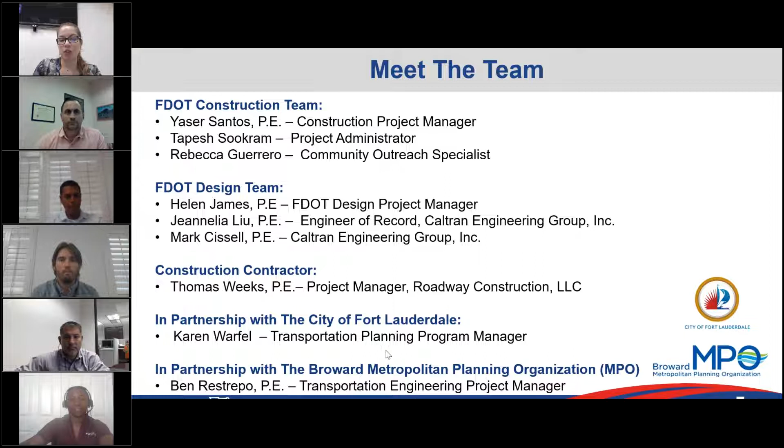In partnership with the City of Fort Lauderdale, we do have on the line Karen Warfel. She is the Transportation Planning Program Manager. Lastly, in partnership with the Broward Metropolitan Planning Organization, the Broward MPO, we have Ben Restrepo, which is the Transportation Engineering Project Manager.

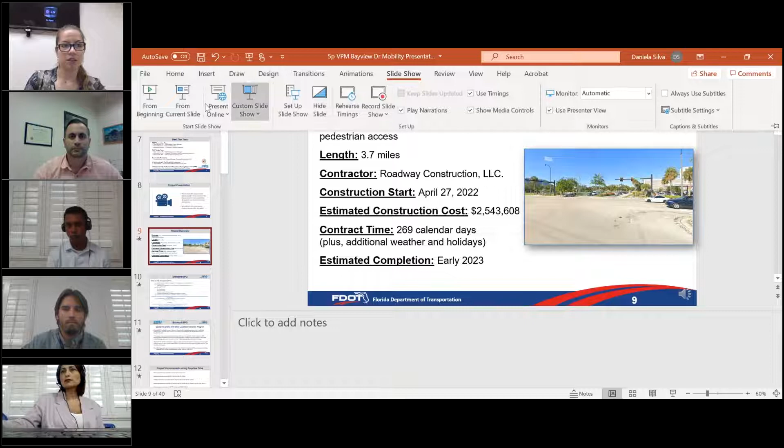As mentioned, the calendar days do not include weather or holidays. The estimated completion for the project is in early 2023.

Slide 10, Broward MPO. The Broward MPO is a federally chartered entity responsible for transportation decision-making in the Broward region, influencing and overseeing expenditure of federal and state transportation funds at the regional level. The Broward MPO consists of 31 municipalities, including the Broward County School Board and the South Florida Regional Transportation Authority, which also develop plans, conduct studies, and establish initiatives and programs. Their mission is to collaboratively plan, prioritize, and fund the delivery of diverse transportation options.

Slide 11. The Broward MPO Competitive Grant Program provides funding opportunities for small local transportation projects which improve safety and mobility for all transportation users in Broward County. The program also funds projects such as complete streets projects, traffic calming and intersection improvements, ADA upgrades, mobility hubs, bus shelters, bike racks, and technology advancements such as transit signal priority and traffic control devices. Applicants are required to submit program-ready projects with proof of roadway ownership, a well-defined scope of work, partner collaboration, cost estimate, documentation of public outreach, and resolution support.

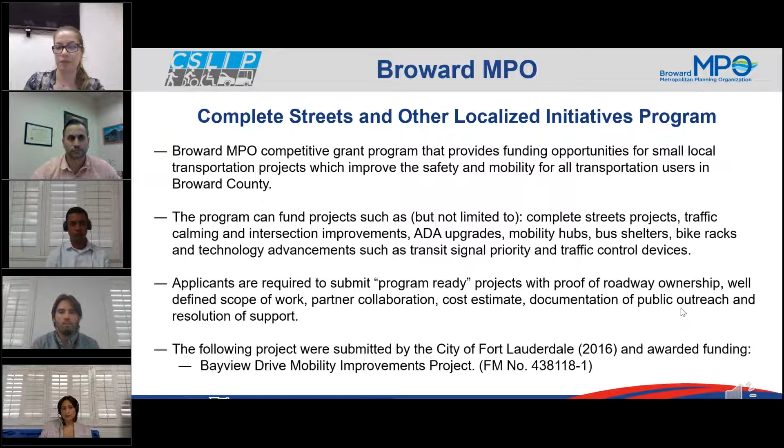As part of this project, improvements along Bayview Drive include providing continuous sidewalks on both sides of the road, adding bicycle lanes from Northeast 26th Street to Northeast 25th Place, installing mid-block crossings between Northeast 11th Street and Northeast 45th Street, raising the intersections at Northeast 14th Street, Northeast 18th Street, Northeast 27th Street, and Northeast 40th Street, and constructing roundabouts at Northeast 37th Drive and Northeast 47th Street. This project will also include widening the roadway from Northeast 23rd Street to east of Northeast 24th Court.

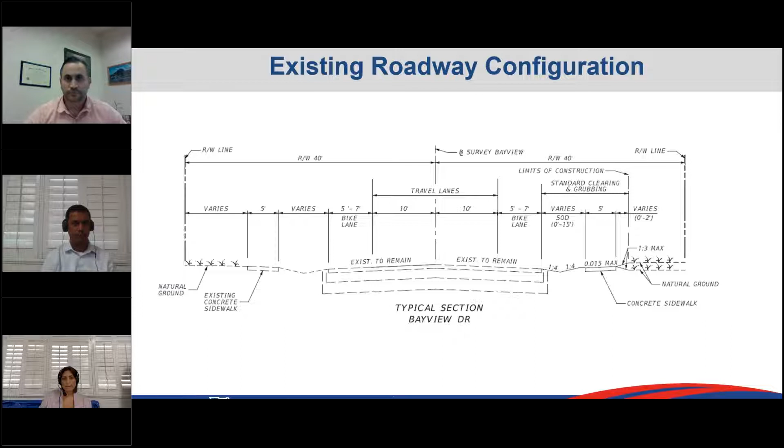So we are currently on slide 14, showing the typical section for Bayview Drive and Northeast 13th Court, with 10-foot travel lanes eastbound, northbound, and southbound, 5 to 7-foot bike lanes, and swale areas with sod that vary from 0 to 12 on the southbound area, and from 5 to 6 on the northbound area. The bike lanes are 5 to 7, and then the sod or swale areas are 5 to 6 on the northbound, and 0 to 12 on the southbound, including also the sidewalk, a 5-foot sidewalk in each direction. Next slide, please.

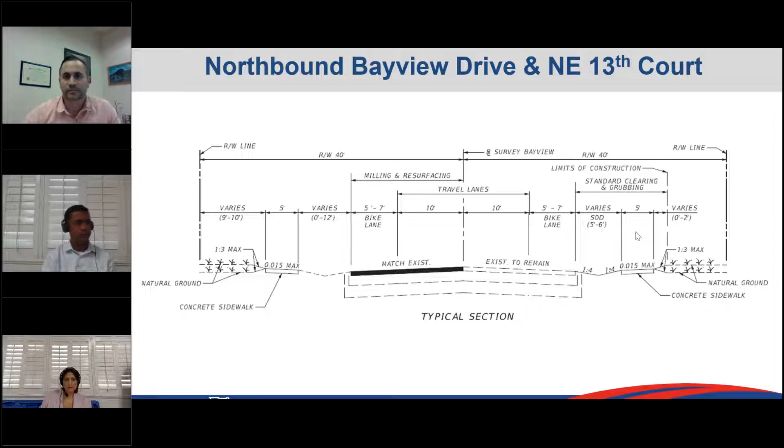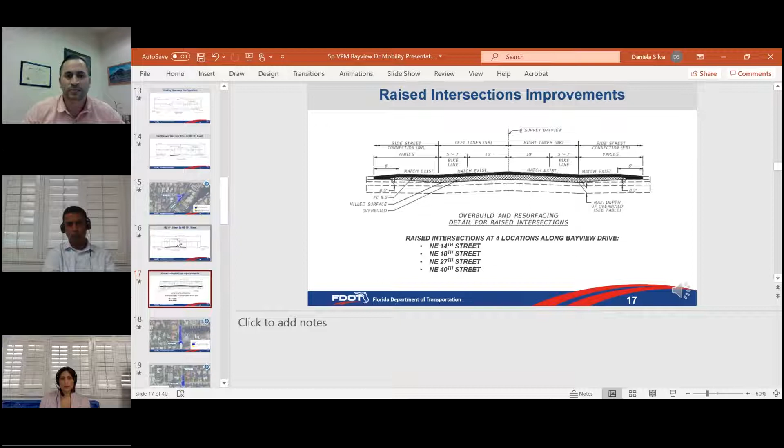Daniela, please go back to the previous one. Thank you. Sorry, bear with us for a second. All right, so that will be slide 15. I think it's the previous one. There you go.

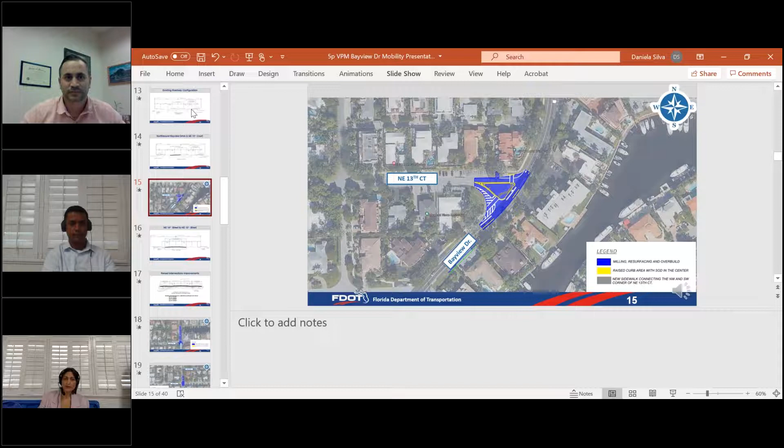Thank you, Daniela. All right, so in the area, as I mentioned, we are using the yellow lines to denote the raised curb area with sod in the center. The gray highlighted portion shows the sidewalk connection in the middle of the island, and then the white lines are showing white striping. Next slide, please.

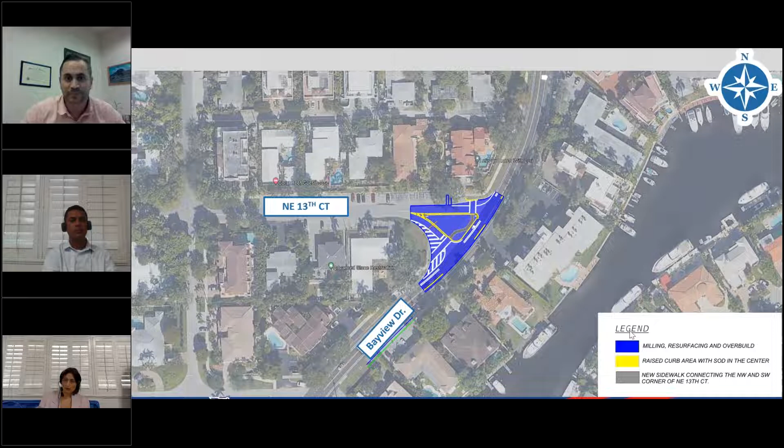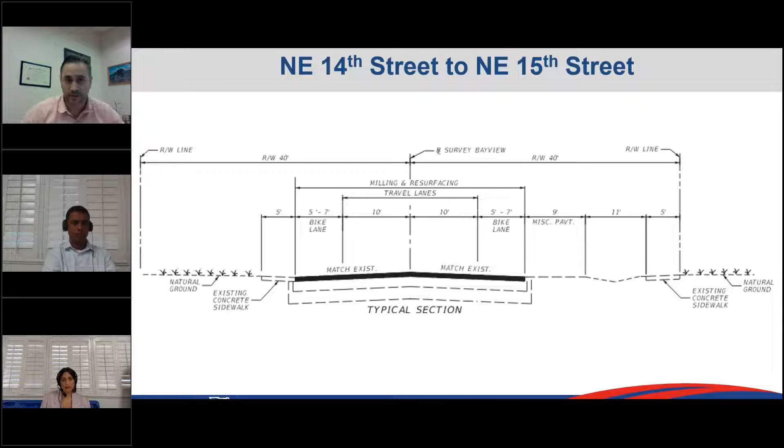This slide shows the area where we are working on the intersection. These are the intersection improvements happening at Bayview Drive and Northeast 14th Street, Northeast 18th Street, Northeast 27th Street, and Northeast 40th Street. We're going to be milling, resurfacing, and repaving, keeping 10-foot travel lanes in each direction, 5 to 7-foot bike lanes, and matching the side streets.

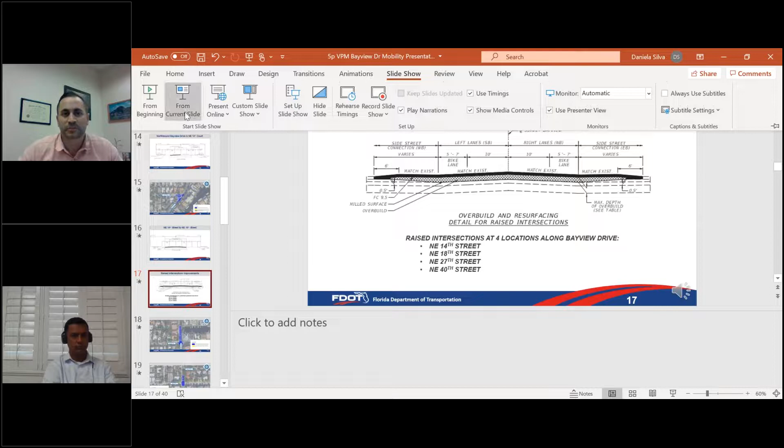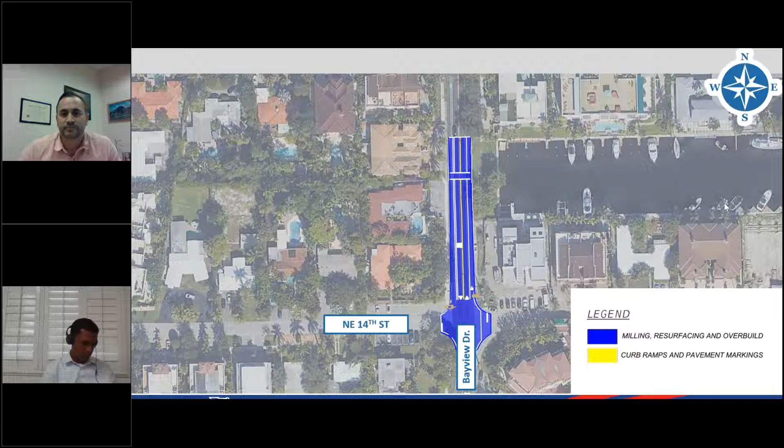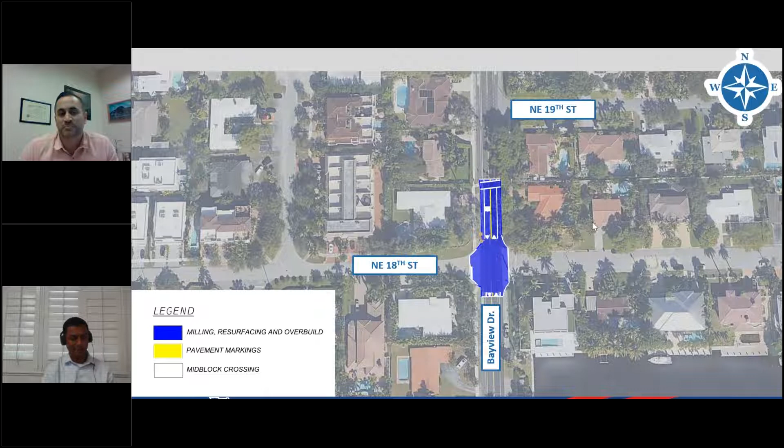The other intersection where we're raising the pavement is at Northeast 18th Street and Bayview Drive, where we're highlighting in blue the area to be repaved. Again, white lines show striping and a mid-block crossing just north of Northeast 18th Street, and yellow shows pavement markings as well.

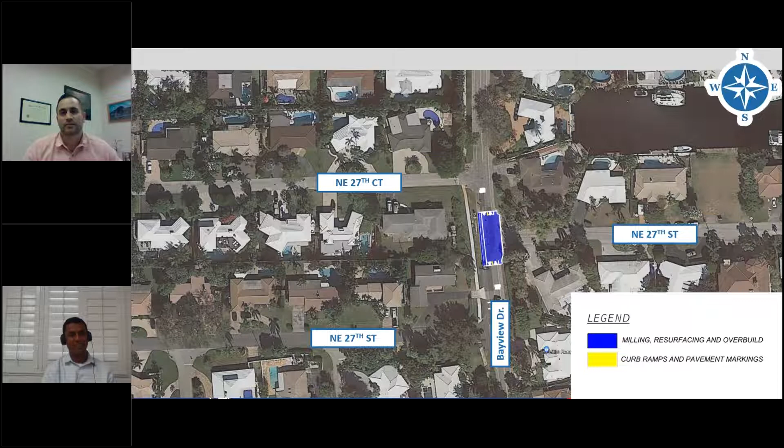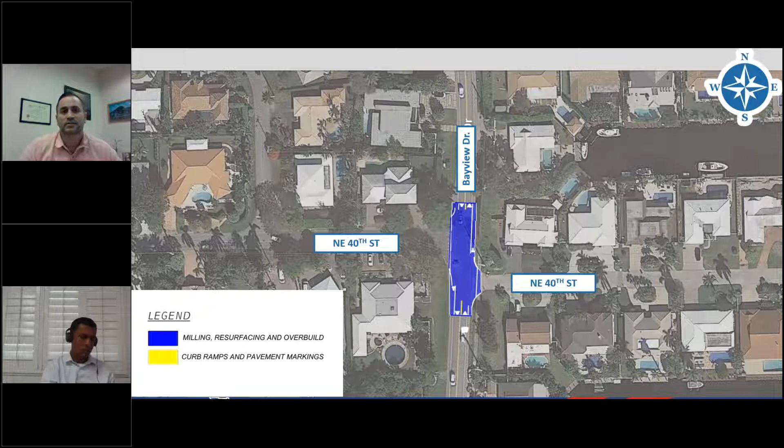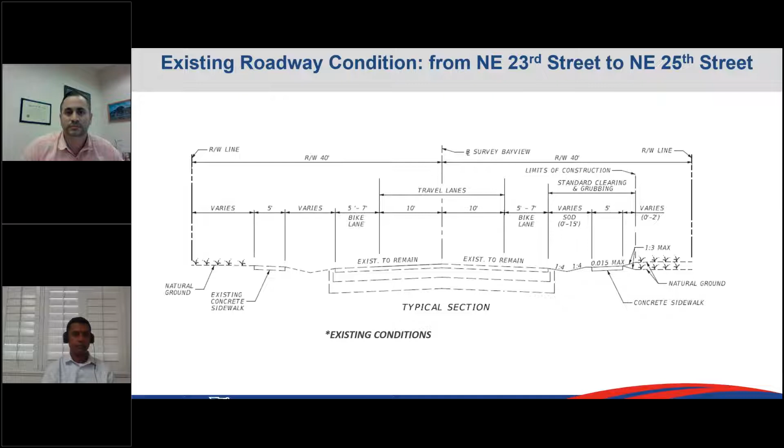In this area, we are showing the location from Northeast 23rd Street to Northeast 25th Street, but emphasizing where we are going to be widening and addressing two intersections. We'll provide 10-foot travel lanes in each direction and 5-foot bike lanes, matching existing grade. Also, a median varying from 0 to 9 feet will be implemented.

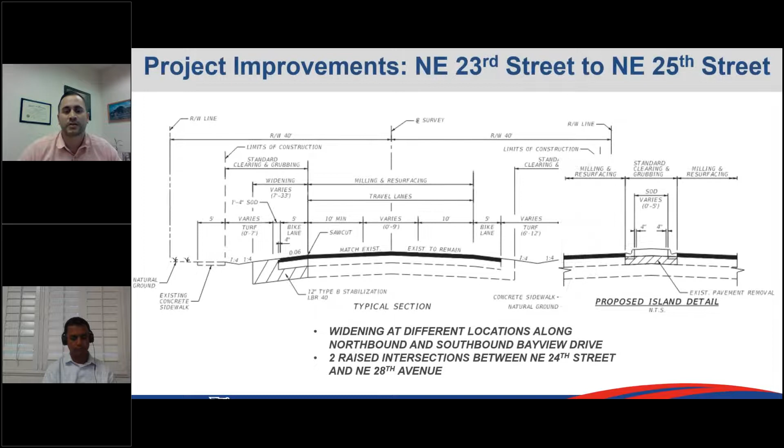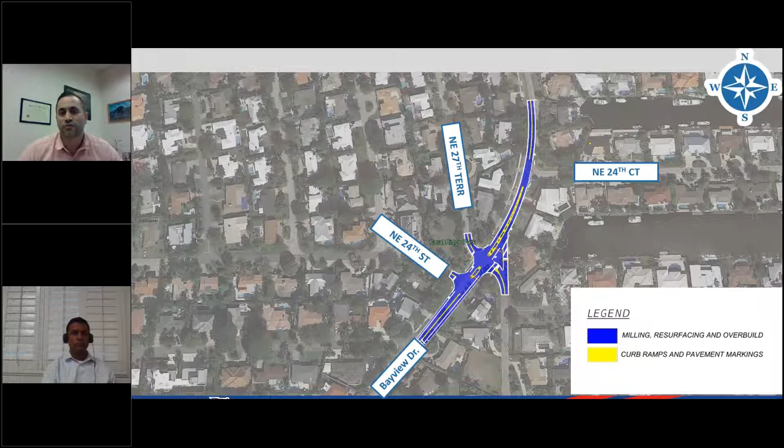At this point, I'm going to pass it over to Mr. Tapesh Subram, the project administrator, who will be taking the lead on this project. I'll be highly involved with him to achieve a successful project, so thank you for your attention. Tapesh, you can take over. Thank you, Yasser. As Yasser mentioned, my name is Tapesh Subram.

I'll be the project administrator for this project, and I'll be providing narrative for slides 25 to 33. Slide 25 shows the milling limits along Bayview Drive southbound beyond 26th Street. This area will be widened, milled, and then repaved.

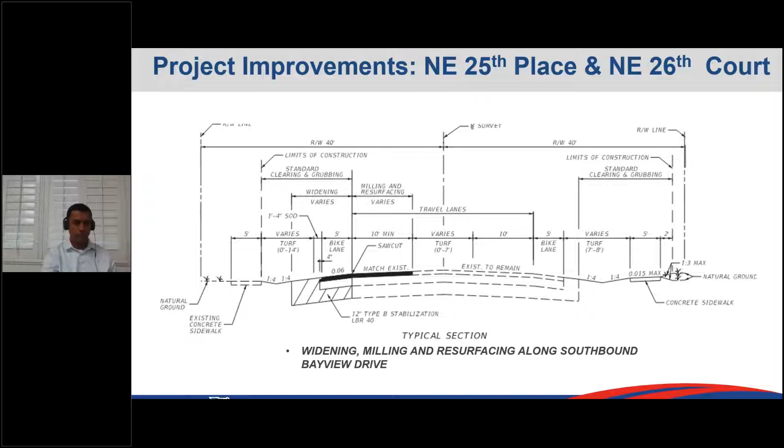Slide 26 shows the proposed improvements at the intersection of Bayview Drive and Northeast 26th Street. The intersection will be widened, milled, and repaved. No changes will be made to the existing lane widths.

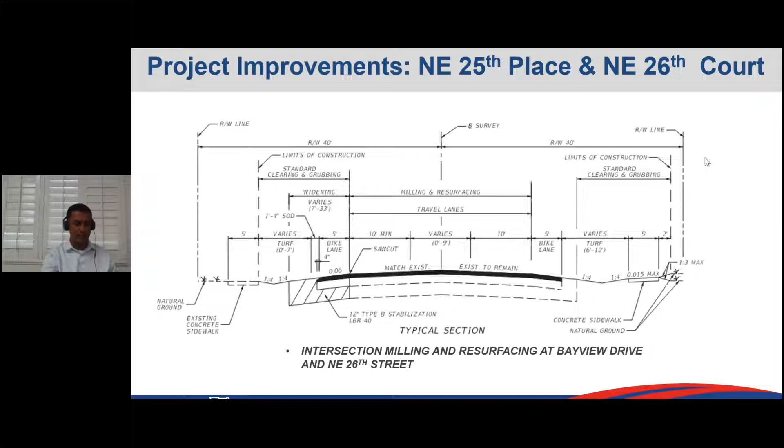Slide 27 shows the limits of the proposed improvements between Northeast 25th Place and Northeast 26th Street. The image on screen shows the final configuration of the limits at this location.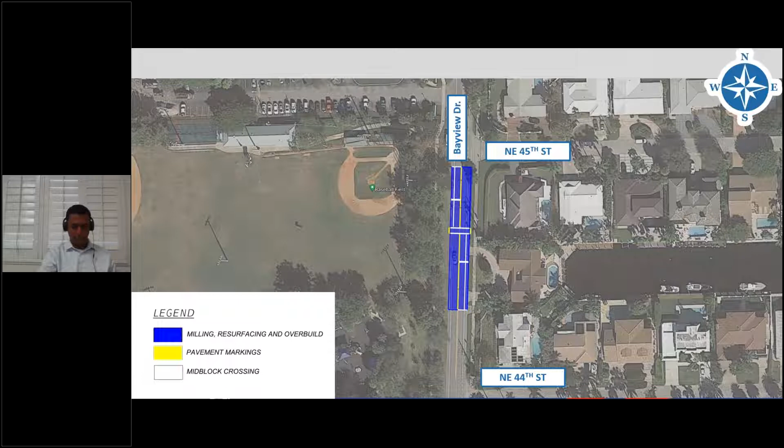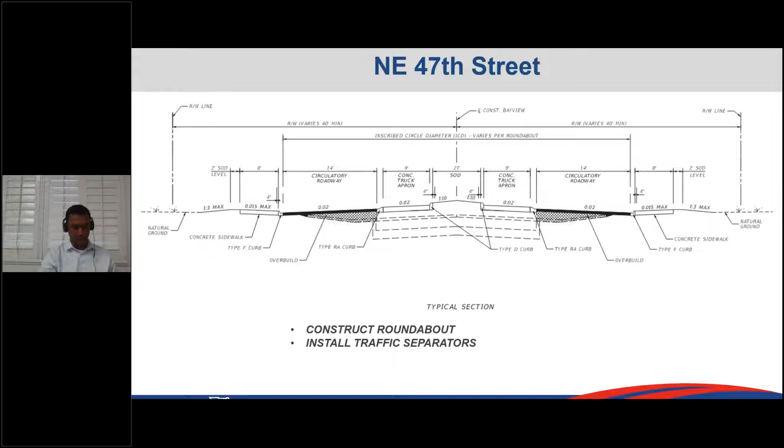Okay, so this is the second roundabout proposed for this project. Slide number 32 shows the cross sections of the proposed roundabout at Northeast 47th Street and Bayview Drive. At this roundabout also, the improvements include 8-foot sidewalks, new curb and gutter, and also a 14-foot circulatory roadway. Next slide.

Slide 33 shows the final configuration of Northeast 47th Street and Bayview Drive. The area shown in blue shows the areas to be milled and resurfaced. The areas shown in yellow are the raised curbs and new traffic striping, and the areas in green show the new proposed sidewalk along Bayview and how it connects to the existing sidewalk. Next slide.

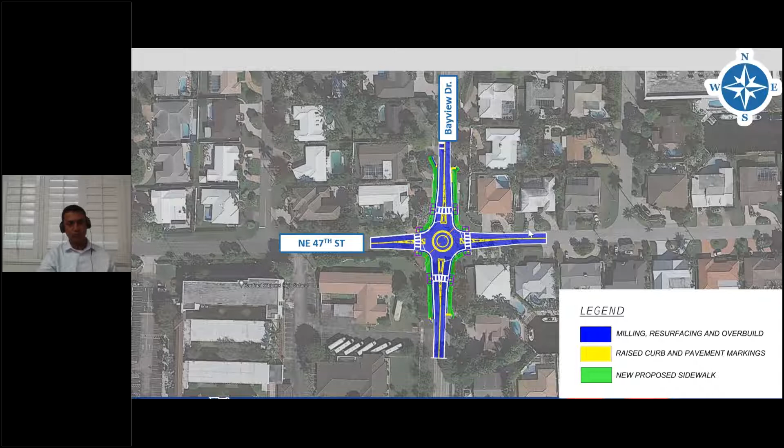Thank you to Pesh and Yasser. We're currently on slide 34, maintenance of traffic. Public safety is FDOT's top priority, so work zone signage will be placed along the corridor, consisting of advanced warning and project signage and lighted messaging boards. Ongoing coordination with local agencies and businesses will be conducted to ensure bus route accessibility and access at all times. Currently, the team is coordinating with Broward County Traffic Engineering Division, Broward County Transit, City of Fort Lauderdale, local first responders, and Broward County Schools.

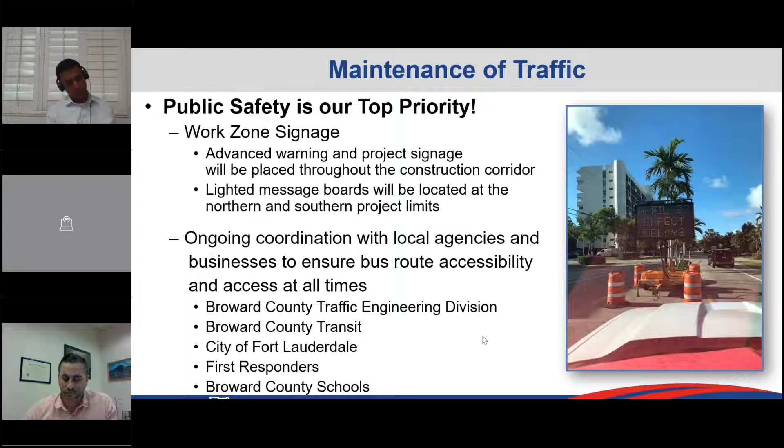Slide 37, we will now go ahead and open up the floor to any questions or comments. We do have some comments already in the queue, so I will begin reading them out for the team to address. The first question, from Catherine Taylor, asks if we will be sending out the PowerPoint presentation. This presentation will actually be placed directly onto the project webpage.

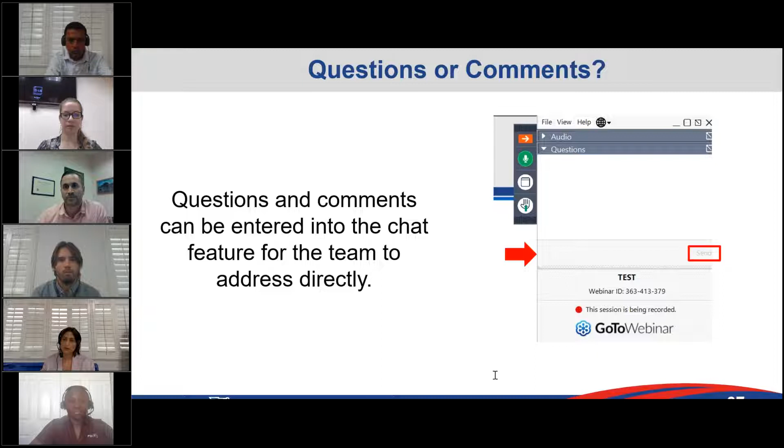Sure. Daniela, at this point, I would like for the designing team to turn on their cameras as well. Going back to, and thank you for your question — while responding to that, this project was part of a study performed by FDOT on behalf of City of Fort Lauderdale. The scope of work determined that those intersections were the main ones, but I would like to pass it over to the designing team. In this case, we have Janelia, and we have Mark. We also have Helen. Perhaps they would like to expand on that. Thank you.

So Daniela, perhaps we should repeat the question. The question was, how do we get an additional raised intersection at 25th Street and Bayview? Perhaps some kind of speed bump is necessary between 26th Street and 24th Court.

I'll recommend they reach out to the city, because the city prepared the intersections that were scoped for the project to be raised. They did explore putting speed bumps along the corridor. However, speed bumps do hinder emergency vehicles, so I don't think they'll like to install one in this location. But for another raised intersection, yes, we can bring that up to the city.

The next question we have: how high will you be raising the intersection at 40th Street? I can answer that, and then perhaps Janelia wants to jump in. The maximum overbuild we're implementing in the area is going to be 3 inches. Janelia, would you like to expand on that, or Mark?

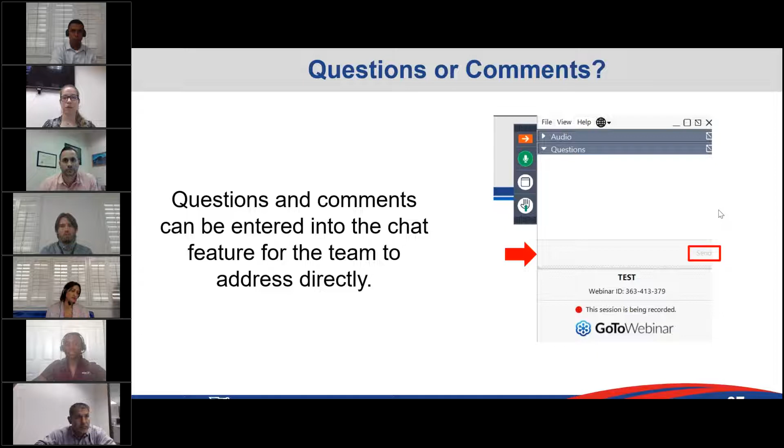A follow-up question from Kimberly Ruggiero: we were told a roundabout is being put in at 26th Street and Bayview. Is that being done by the city, or will that be implemented as part of this project?

I can take that question, Daniela. That will not be part of this project. I would defer to someone from the city to comment on whether it's part of the scope of their upcoming projects. It will most likely be considered for a future project.

We have an additional comment: we were told this project would not begin until school concluded. However, there is a new sign on Bayview Drive that says construction begins May 7th. Can you please clarify?

Yes, I can take over. Tabesh, basically the project is on track to start this week, as we are showing in our flyer and communication. However, the area by the school, which is the roundabout by 47th Street, is limited to happen once school is out during summertime. That's the only time frame we have to build that. As soon as we reach August, when school comes back, we need to be out of the area. That's a strict requirement we have in the plans.

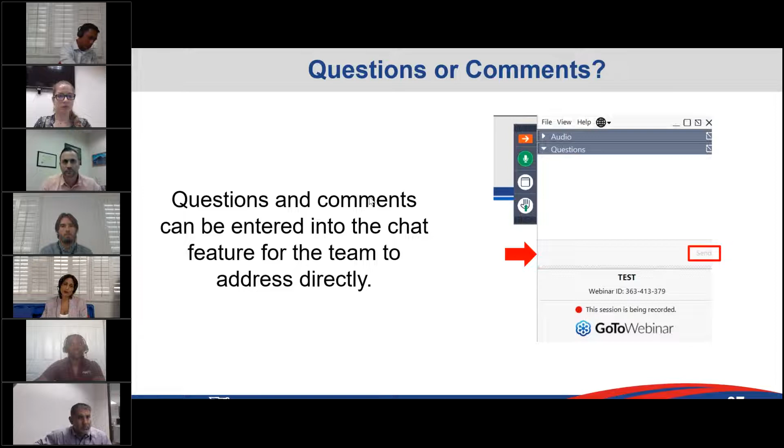Thanks so much. I was wondering, can you go back to one of the very beginning slides, the project improvements? Which one, specific intersection?

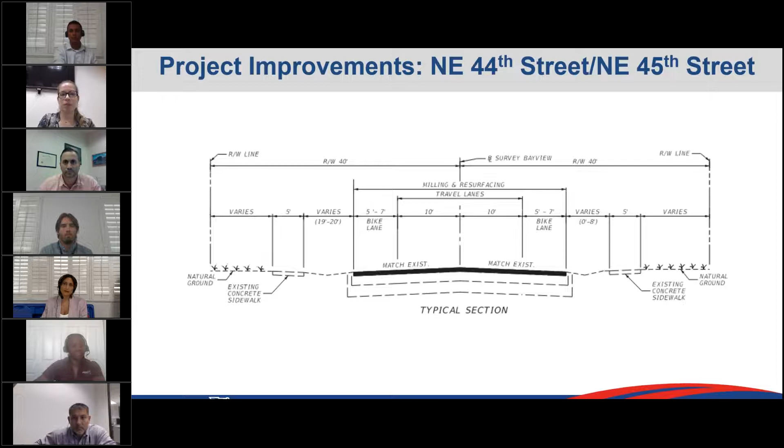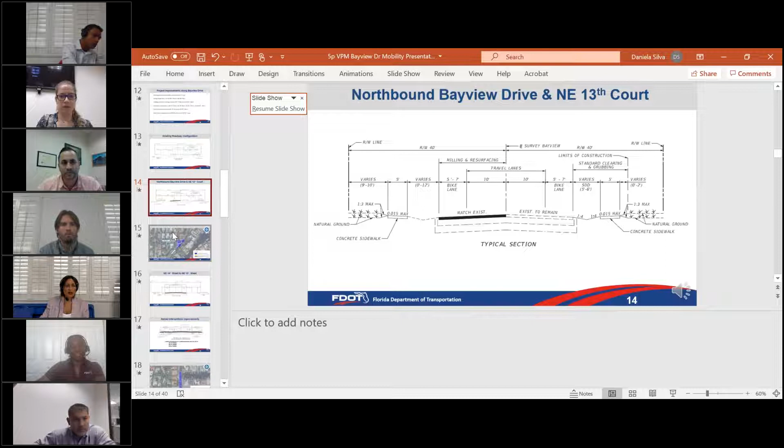It started with providing continuous sidewalks, it was one of the very first ones. It gave an overview, I think it's the general slide where we show this. That one, I think you passed it. It was that one, the one right on top, slide 12. Yeah, should I be... I think it's 12, yes, it's 12. Should be 12, Daniela. Perfect, yeah.

This is slide 12. I still can't, the slide up right now is still project improvements Northeast 44th Street. The slide I'm looking for says project improvements and begins with providing continuous sidewalks, and below that is a bullet that says adding bicycle lanes. Below that it just goes down the line. It was one of the very first ones that you did.

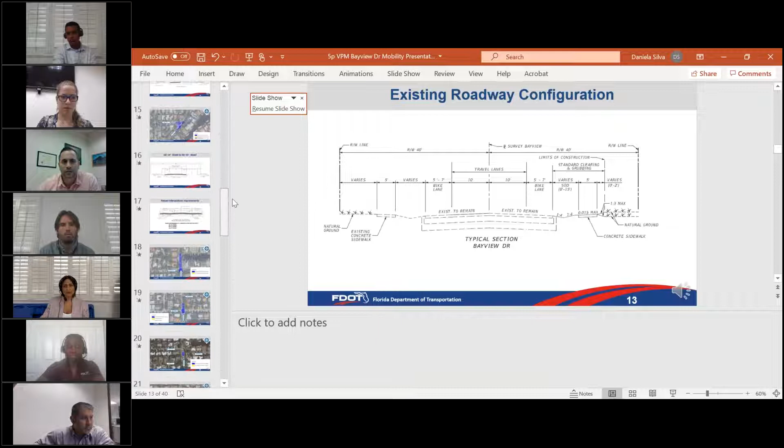Slide 12, Daniela. So slide 12 shows providing continuous sidewalk. I can't see that on the screen. I'm gonna read it for you: provide continuous sidewalk on both sides of the road, adding bicycle lanes from Northeast 26th Street to Northeast 25th Place, installing mid-block crossings between Northeast 11th Street and Northeast 45th Street, raising the intersection at Northeast 14th Street. We also have 27th Street, 40th Street, and if I'm not mistaken, it should be 18. Let me see. Perfect. You guys can't pull that up?

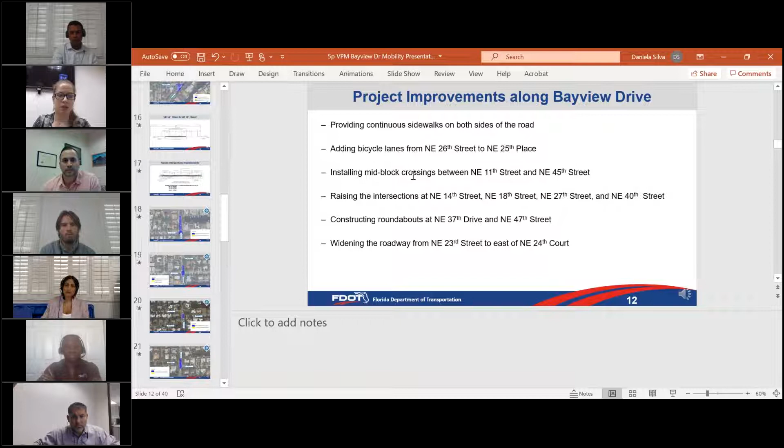I'm making notes and I want to, you can't pull that slide up? She's attempting to pull it up at the moment. Which slide specifically? This one, slide 12, but for some reason she's not able to. Right, maybe you can play the slideshow? Okay, I see it, all right.

That's perfect. My question was, and I work for Commissioner Heather Moraitis, the one thing she was concerned about was irrigation and that being put in the roundabouts. I don't know, and I just want to confirm, is that going to happen, or we had discussed it before, but...

Yes, that's a really good question, and I'm sure Yanelia will provide a better answer. But yes, we are providing irrigation and power connections for the roundabouts, for any future plantings or lighting that might be put in the center. Thank you so much.

To clarify, the plans will provide irrigation sleeves, not an irrigation system. Got it, okay, thank you.

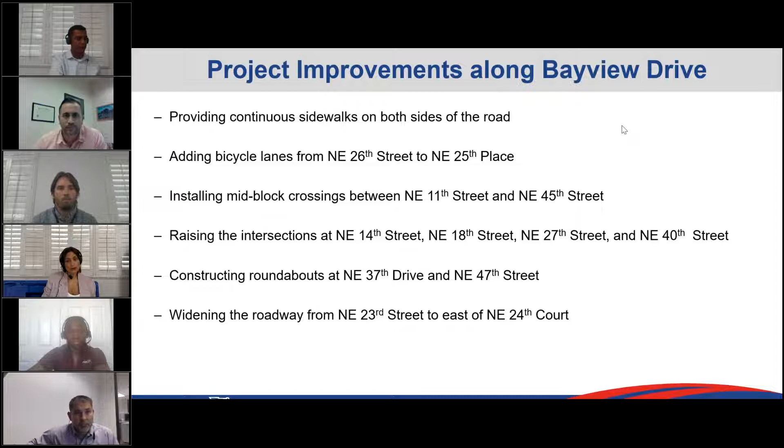It's not part of the scope of this project, but there is a response that I need to provide to a stakeholder. So there's a conversation I need to have with the City of Fort Lauderdale, and that will be one of the things I'll bring to their attention for them to consider in upcoming projects. I appreciate that, thank you very much. You're welcome.

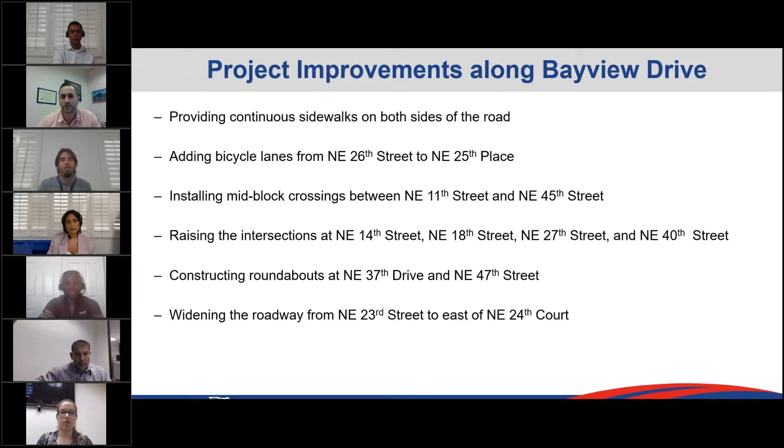Okay, who's my contact for that? Yes, Daniela, I think we may go back to the very first project team members, perhaps Karen. And I think that's something that the HOA members, presidents, and board members have been asking, so we are going to share with you the information. I took a picture of it.

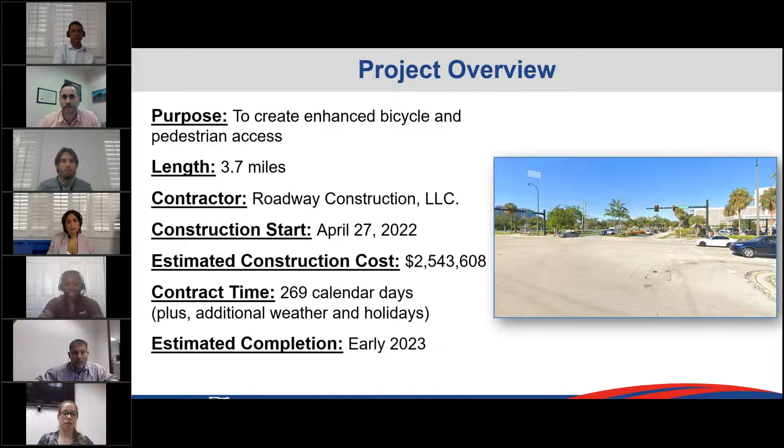It doesn't give me any contact info, but let's see, FDOT construction contract, we can share that with you, Ms. Bullis. We can share all the pertinent contact information. All right, perfect, thank you.

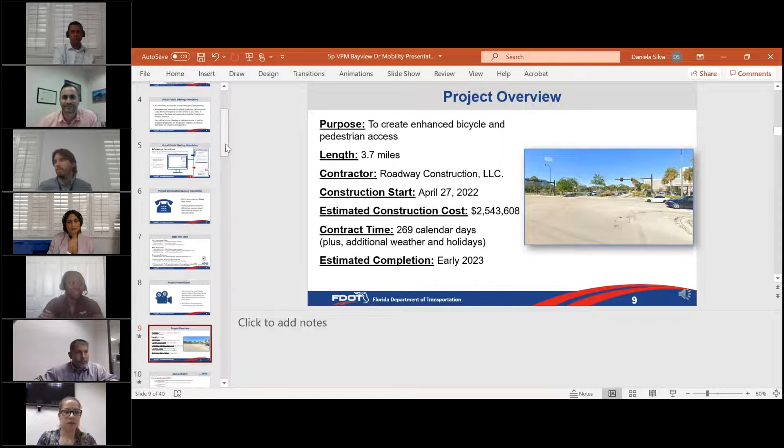For further assistance, you can send your concerns over to myself, the project administrator for the project, and I would forward your concerns over to the relevant person in the city to get a response for you on that.

Okay, is that Ben speaking? No ma'am, my name is project administrator Tapesh. Okay Tapesh, your name on the computer says Ben Restrepo. Yeah, that's all right. Sorry about that, there were two Ben Restrepos actually. Got it, okay, so what's your name? I'm sorry, Tapesh. T as in Tom, A, P as in Paul, E-S-H. All right, I see it now.

Thank you, you're welcome, and you can always direct it to any of the team, and we'll make sure we respond to you, we will work together for this. So thank you. It's very important to our community, just so you know.

Okay, I do have another question, a hand raised from Linda Carter. We will go ahead and unmute you. If you're self-muted, you can just unmute yourself. Can you hear me? Yes.

So on the milling, which is what I call re-asphalting the street, will it be a checkerboard effect along Bayview, or does the whole boulevard get a clean surface, or is it stop, start based upon where you're working?